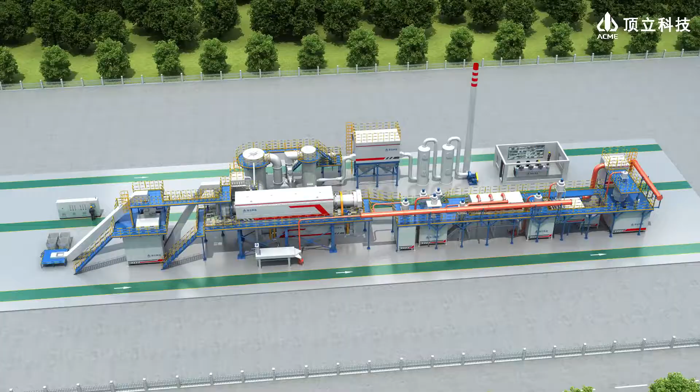Complete set of equipment for recycling and reusing waste batteries. This system has an annual processing capacity of up to 10,000 tons.

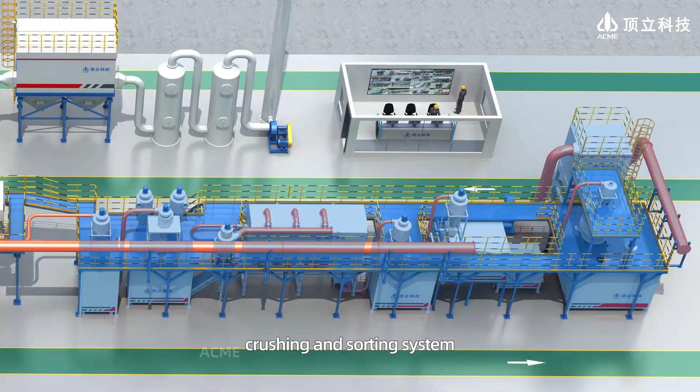The production line consists of 6 major systems: the crushing system, pyrolysis system, cooling system, exhaust gas system, crushing and sorting system, and centralized control system.

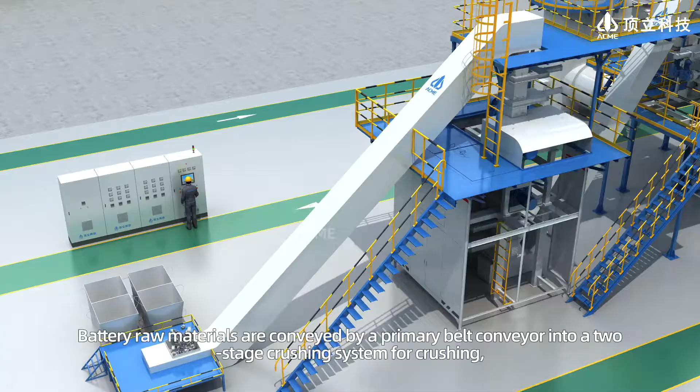Battery raw materials are conveyed by a primary belt conveyor into a two-stage crushing system for crushing, with inert gas protection implemented during the crushing process.

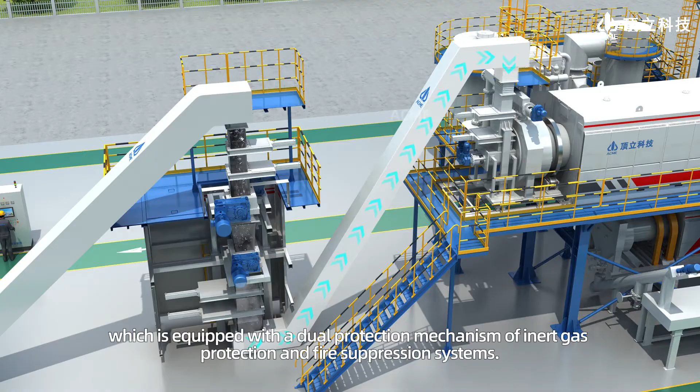After crushing, the materials are conveyed by a secondary belt conveyor, which is equipped with a dual protection mechanism of inert gas protection and fire suppression systems.

The crushed battery materials are conveyed by the secondary belt conveyor and the feeding mechanism into the pyrolysis system for high-temperature pyrolysis treatment to decompose organic substances.

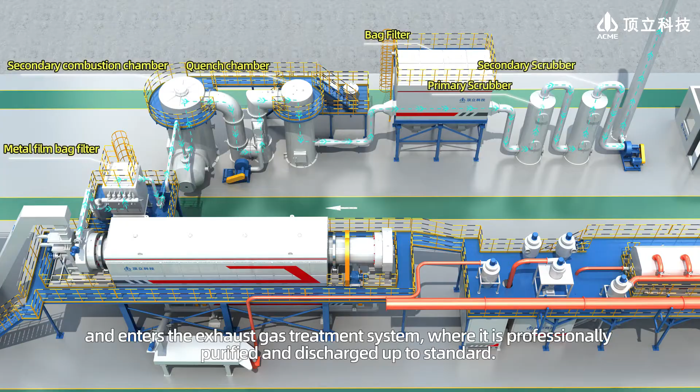The exhaust gas generated during the pyrolysis process is collected by the furnace head collection system and enters the exhaust gas treatment system, where it is professionally purified and discharged up to standard.

Meanwhile, the materials after pyrolysis are conveyed by the furnace tail discharge hopper into the cooling system for cooling and temperature reduction. The cooled materials are conveyed by the discharge conveyor to the crushing and sorting system.

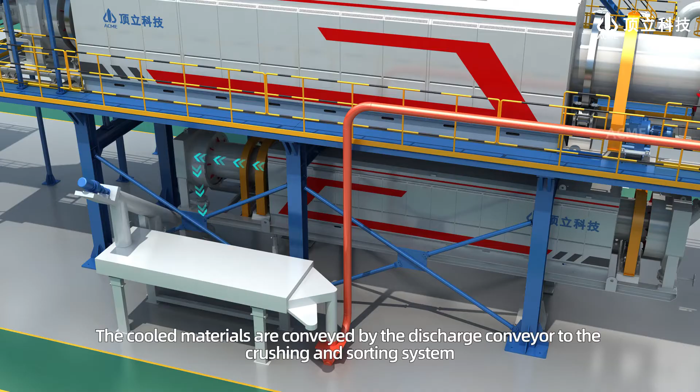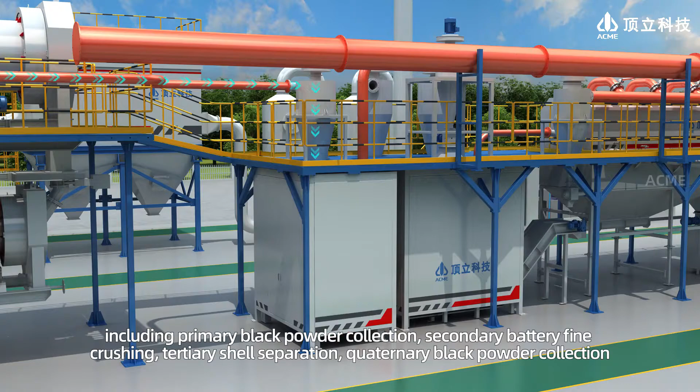The crushing and sorting system performs fine sorting and separation of the pyrolyzed battery materials, including primary black powder collection, secondary battery fine crushing, tertiary shell separation, quaternary black powder collection, quinary battery fine crushing, senary black powder collection, and septenary copper and aluminum separation. All separated black powder can be collected uniformly.

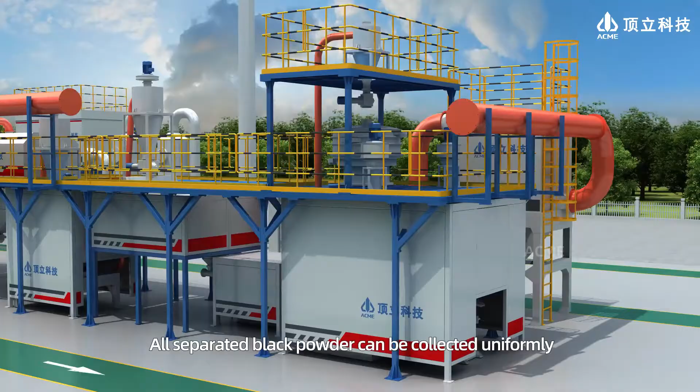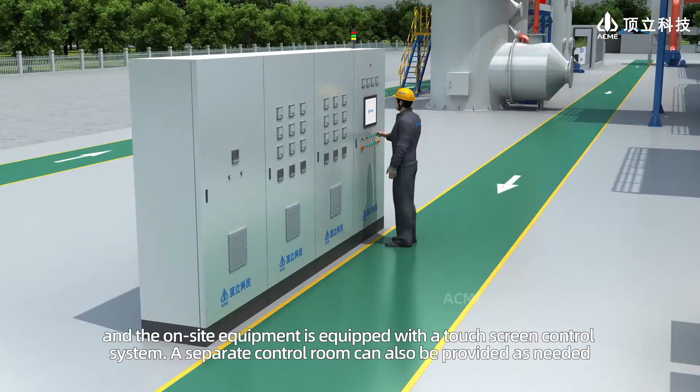The production line is equipped with an intelligent control system, and the on-site equipment is equipped with a touch-screen control system. A separate control room can also be provided as needed.

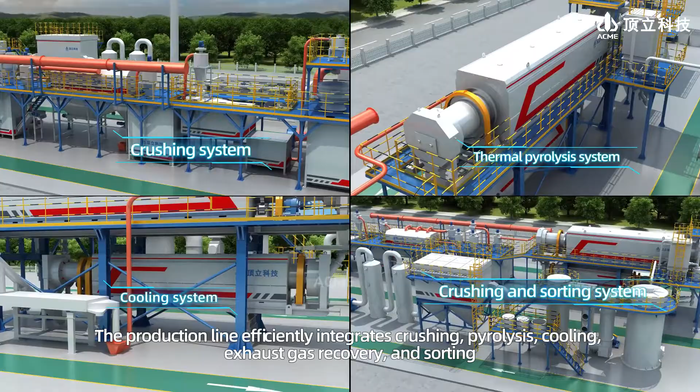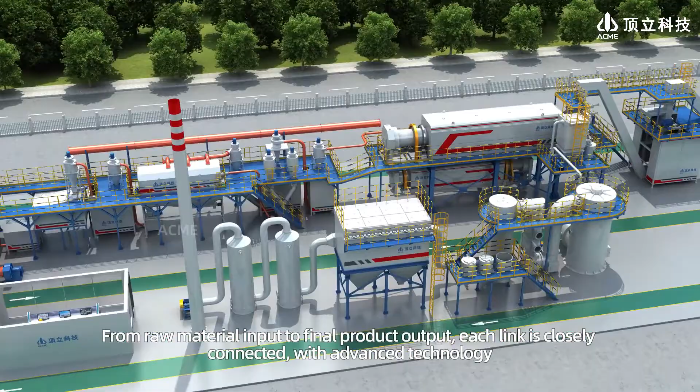The production line efficiently integrates crushing, pyrolysis, cooling, exhaust gas recovery, and sorting. From raw material input to final product output, each link is closely connected with advanced technology, safety and environmental protection, high production efficiency, and efficient processing and maximum resource recovery of retired lithium batteries.

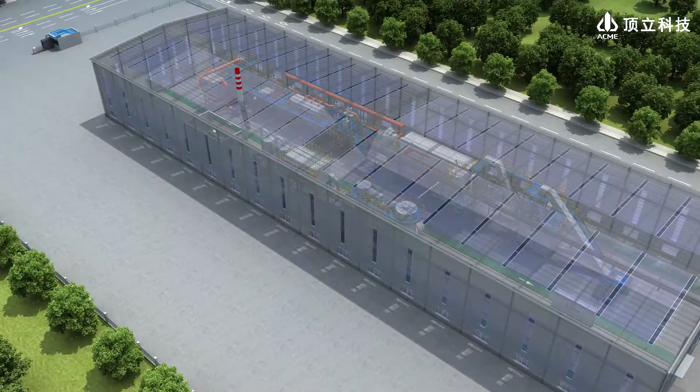We are the solution provider for the complete system of efficient utilization of organic solid waste resources.